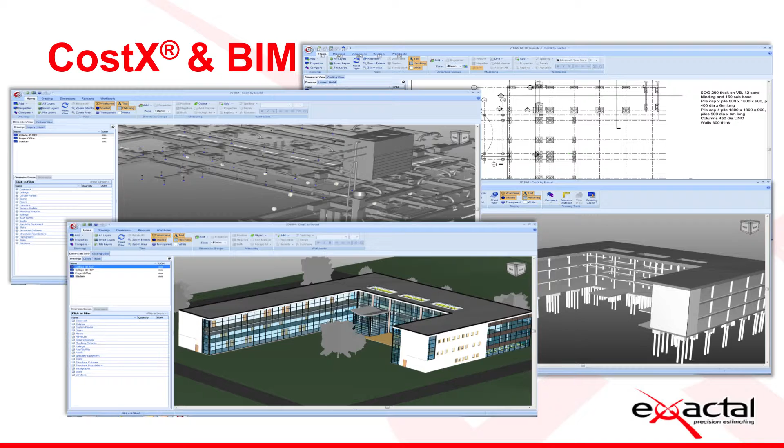We are BIM compatible. Right from the outset we started with Revit, the predominant software back in the early 2000s, but in time we've expanded that to cover IFC files, DGNs, pretty much any 3D model and 2D drawing file you're likely to receive. We can load up MEP, structure, architecture, whatever.

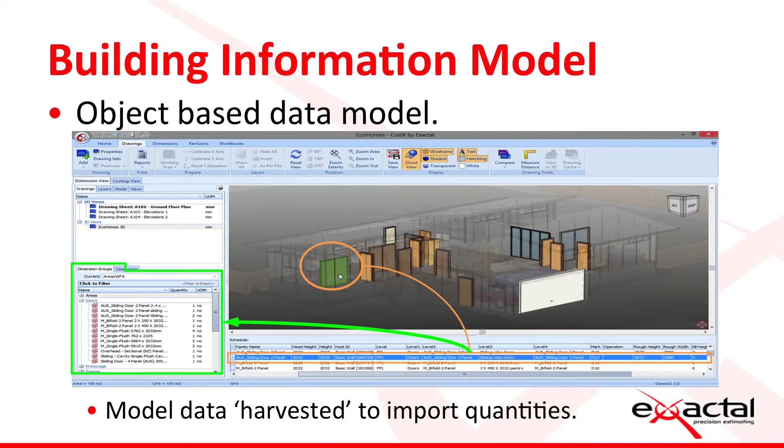Obviously the BIM model has data in it, so the objects have this data, and using what we call the schedule, the list at the bottom, you can pick and choose from all the available properties. It's not automatic that you must measure it this way. From the information inherent in the objects in the model, we can pick and choose and map what information you need to extract, or what we call harvesting the quantities, to create your takeoff in the software.

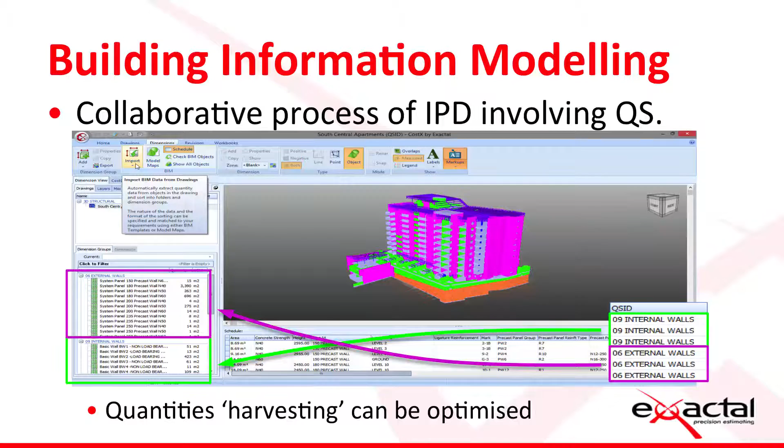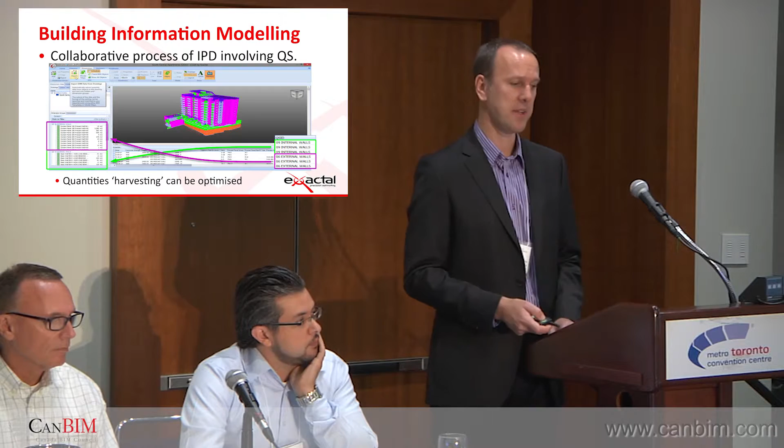In terms of modelling, we talk about IPD and building information modelling. That process of data extraction can be optimised by the QS or estimator getting involved earlier, in the project inception meetings. If that's the case, as QSs and estimators, by having information built into the model which will help you later down the track, it allows you to customise the extraction of the quantities.

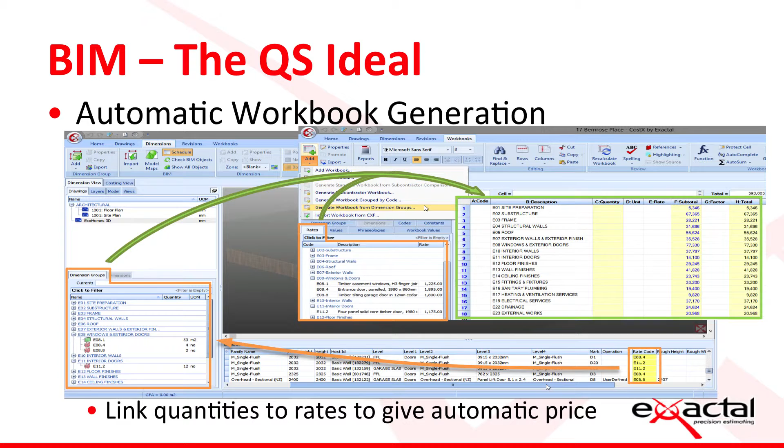The idea of all that is a process of automatic workbook generation. In this instance we've got rate codes, and a lot of contractors nowadays have in-house BIM capability, so with their own designers they're able to build in a rate code in the object properties. That can be extracted automatically by an automatic import, which grabs that information from the model and places quantities against it.

On the costing side of the software, you can have a corresponding rate library that contains those codes, descriptions, and rates that go with it. By a process of automatic linking on the Add a Workbook menu, we have an option to generate a workbook from codes, tying the two parts of the software together to automatically create a price. You've got the measure linked to a code, and rates and descriptions linked to the same code. Without touching a keyboard, you can produce an estimate of the project at hand.

No model I've ever seen in the 7-8 years I've been working with BIM is ever 100% complete, they only go to a certain point. I'll quickly whiz through these remaining points.

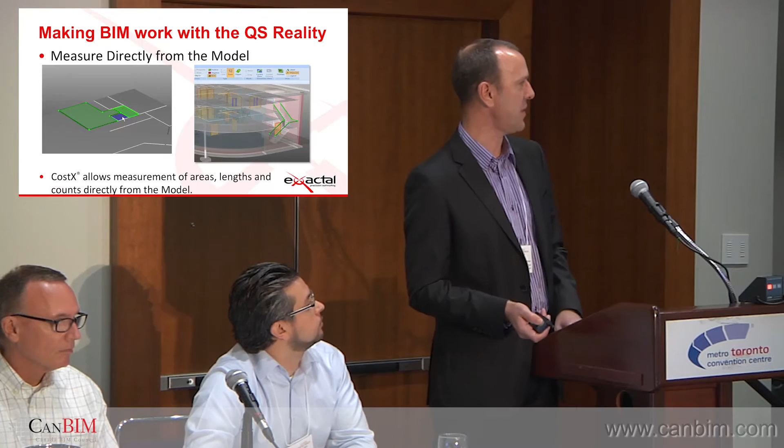We can allow measuring from the 3D model or the quantities you measure in 3D. Because we are a 2D and 3D combined software, whatever you measure off 3D will also be shown on the 2D drawings. If anyone's got any questions, we'll be in the hall.